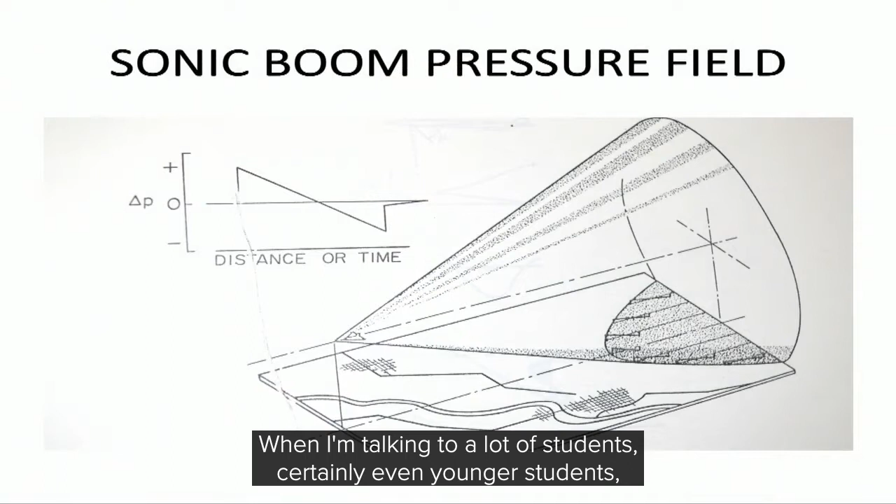Let me talk a little bit about what a sonic boom is. When I'm talking to a lot of students, certainly even younger students, I will often use the illustration of a balloon. All of you have atmospheric pressure on your ear right now, and that's the atmospheric pressure in this room.

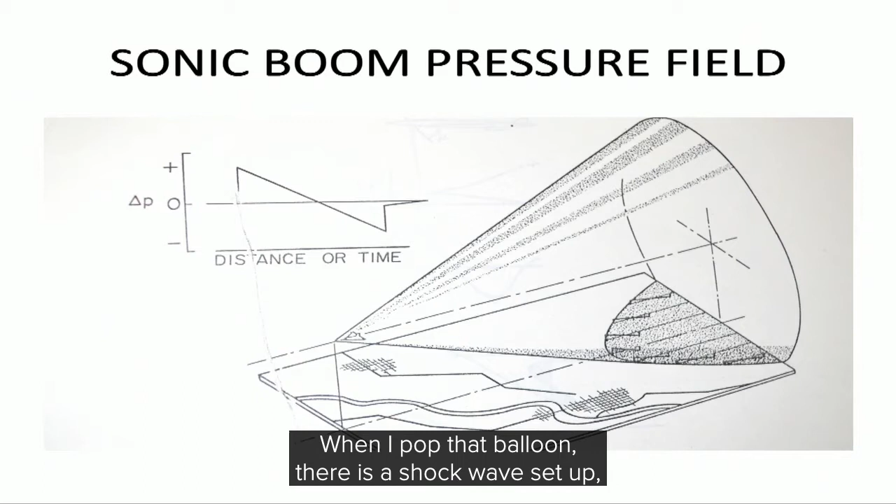If I were to blow up a balloon, I am putting more molecules into it. The air pressure in the balloon is getting higher than the air pressure in this room. When I pop that balloon, there is a shock wave set up going at the speed of sound in all directions, and that speed of sound at sea level is 760 miles an hour. When that shock wave hits your ear, the pressure on your ear jumps instantly to the pressure that was in the balloon. That is the pop you hear.

This has the same concept. When the airplane is going faster than the speed of sound, all of the disturbances that it's generating in the air are traveling at the speed of sound the same way. So the airplane is going faster than the disturbances it's creating, and they're going out in all directions. They continue to grow, that's why this cone is getting bigger and bigger.

What do you call it in math, where all of this is like the barrier to all of the disturbances? All of the disturbances are inside that cone. Because of molecules that are getting pushed out of the way, because of shocks off of the wing and the shocks off of the engines and things like that, all of those things are happening inside that cone. The pressure inside that cone is actually higher than the pressure outside the cone.

If this airplane is flying at 45 or 50,000 feet, that cone is going all the way to the ground. If you were standing in front of that intersection of the cone with the ground, you're in normal pressure because that cone is not in the ground in that white section right there in front of it. But as soon as that airplane moves a little bit, it's dragged over you and you hear the sonic boom. That's what a sonic boom is.

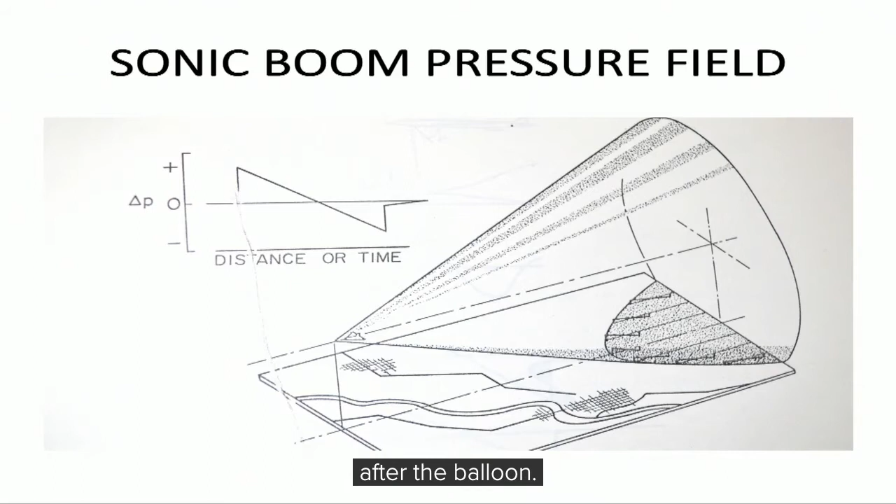Now, a lot of the military airplanes that were flying, their sonic boom was measured by what we call the far-field N wave, that N shape. That front shock is the difference in the pressure on your ear before the balloon and the pressure on your ear after the balloon. So it is the difference in pressure that you hear. See that left part of that N? That's what you're hearing. You can hear the same thing on the back of that N wave too.

If the airplane and things are long enough, there's enough time between those two shocks that you can distinguish it. They used to say if the shuttle flew over you, you would hear a boom boom. But lots of times when you hear a sonic boom, you just hear a boom because they're so close together you cannot distinguish two sounds, it's just one sound you hear. But that is generally how they would measure that delta P and what you hear.

A lot of the work that had been done starting back in the early 50s was work done by a man named Whitham, who tried to relate the airplane and the disturbances with a body of revolution, an axisymmetric vehicle. They were all trying to relate the area distribution, that A sub E, that goes with the airplane, with something called a Whitham F function, which says that if you were far enough away from that airplane, you could use an axisymmetric vehicle and get all of the area from it, and it would actually be an excellent mimic of that airplane and all the disturbances created by it.

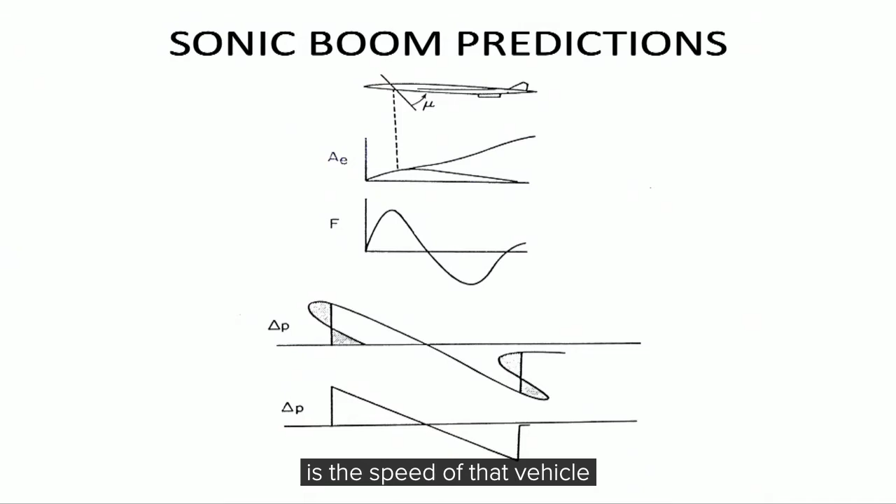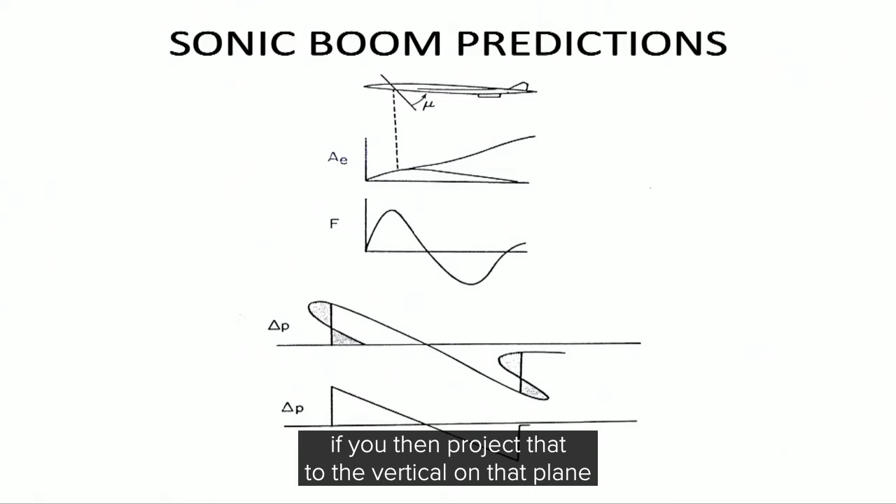That's the angle that you get. So they had the theory that if you had this line, this plane going through your airplane all along its axis, wherever it intersects that, if you project that to the vertical on that plane and bring it down here, that's the area due to the volume of the airplane. And that's what they've done. That's part of the equivalent area due to the volume of the airplane, and that's what the dashed line is going to.

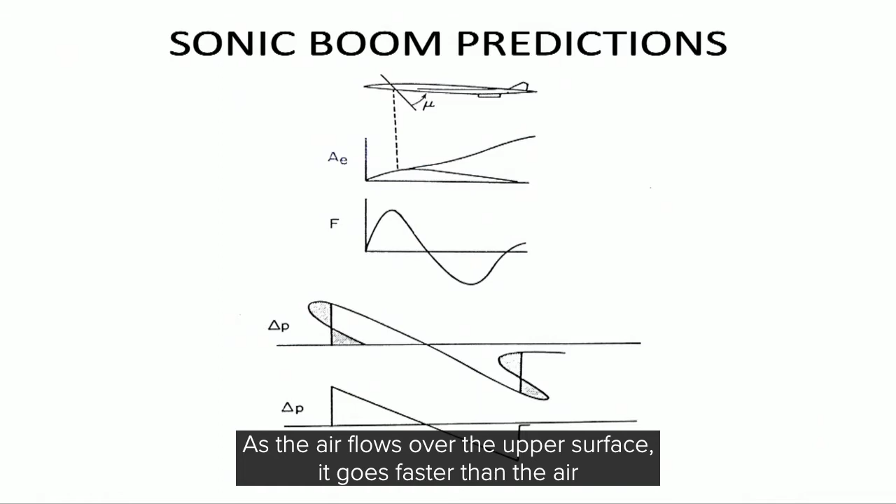They do the same thing with the second force on there. The other thing on the airplane is what keeps it up in the air, which is called the lift. The upper surface of an airplane is curved. As the air flows over the upper surface, it goes faster than the air under the airplane. You end up with lower pressure on top of the wing than you do under the wing. And so the resultant force on the wing is which way? Up. And that's called lift. That is what holds the airplane up.

So the second curve there with A sub E is the lift distribution. You actually integrate the lift up to that point and plot that as the area due to lift on the airplane. Now there are some integral equations that relate F as an integral of the equivalent area, and it's an Abel integral equation, and you can invert it so that you could also describe the area as a function of the F function. And that's what it does.

Now when that F function is flying, so to speak, it advances according to its amplitude. So down here on this fourth figure, you see that the top peak of that F function has advanced and it's double-valued. And so what they do is say, well, we can get rid of this multiple value, which isn't real, by bisecting that area, and you end up with the N wave again. That's how they were predicting the sonic boom signatures in early days.

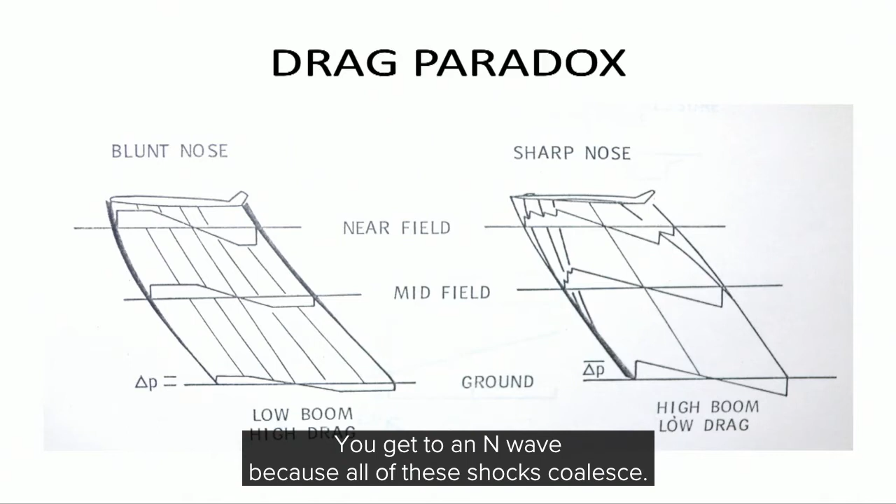So here you have one of the things that a sharp-nosed airplane shows — how all of this comes down through the atmosphere and to the ground. We called that the drag paradox, because you've got shocks coming off the nose of the airplane, shocks coming off other parts of the airplane. You get signatures up there that have lots of jags in them, and then you ultimately get to an N wave, because all of these shocks coalesce. Every time the shocks coalesce, they get stronger, and that's why that N wave can end up being very big.

Well, there was another discovery made by, I think, a man named Jones, who said, if you don't want that shock to move, if you don't want that front shock to intersect with those other shocks like we see over there, you don't want any increasing of the power of those shock waves — you need to make a lot of area in that airplane. So they said, okay, we're going to make that a Dirac delta function. It's an infinite jump, and then your airplane is going to be very, very blunt in the front. Well, it's pretty good — if you look through there, you don't see any of those areas coalescing with each other. They all attenuate all the way to the ground.

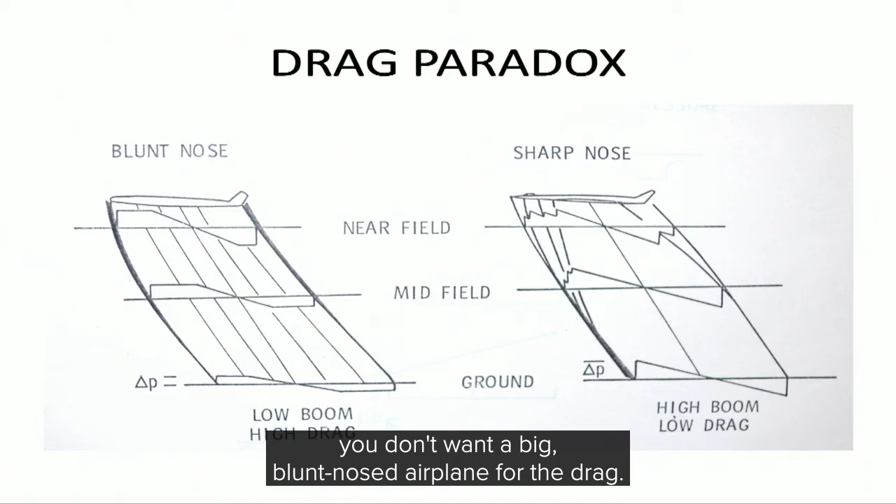But that big blunt nose costs a lot of gas. Somebody was talking about the drag on an airplane — you don't want a big blunt-nosed airplane for the drag. So that was one of the theories that we had to look at and think about: should we actually do that? And so that was the idea of the F function with the Dirac delta function in that area.

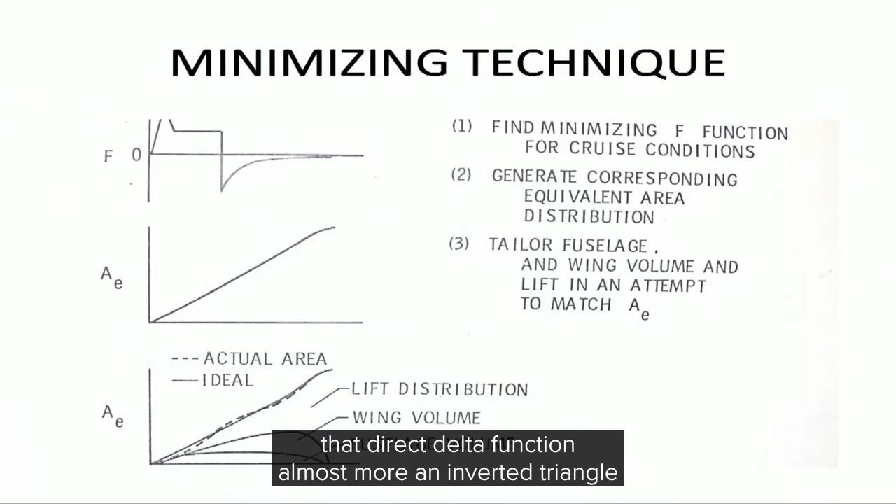One of the things my boss suggested is maybe we should actually make that Dirac delta function more of an inverted triangle and be able to control that, make it as wide as we could or as small as we could, to see what it does to the drag of that aircraft when we're designing it. That's one of the things I did.

What you want to do is describe what your minimizing F function is going to look like, and that's what that top curve is. It could be the Dirac delta function and then the flat area, and then you get that. Once you get the F function, you can define your area, and once you define your area, that's where we went to work defining airplanes.

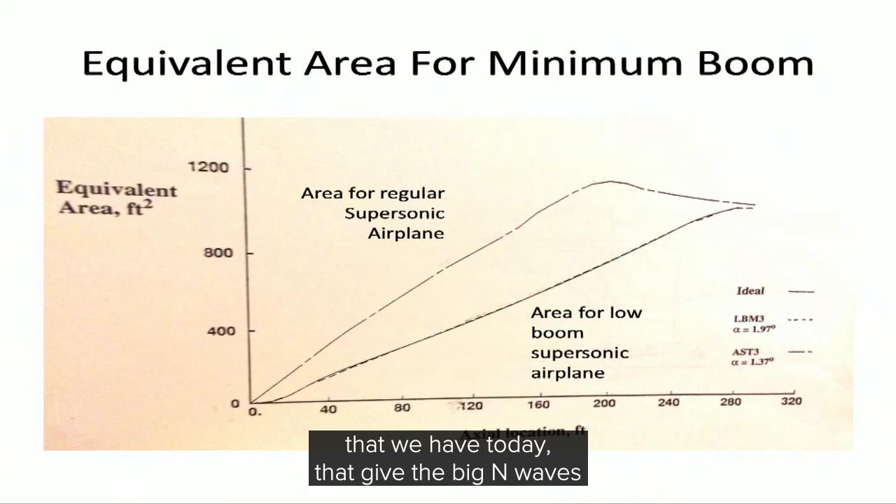So these are some equivalent areas that came out of the program we ultimately wrote. The top curve is more like the fighter airplanes we had today that give the big N waves, but the curves coming out of these low boom planes were the lower curves.

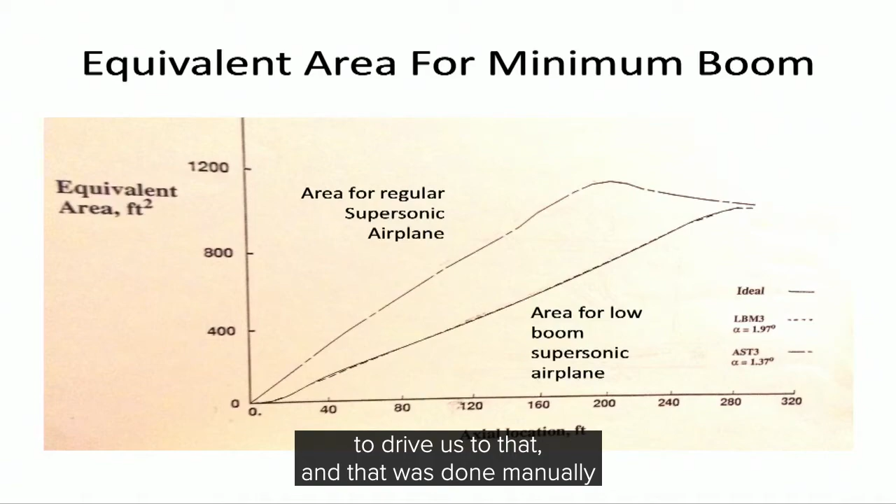Once the code was running, we started designing airplanes. We would design the fuselage and the wing, calculate the area due to volume and the area due to lift, add them up, and see how close it was to the target we were getting to. You can see the dashed line there, we got pretty close on that one. That might have been after 30 attempts, because the first attempt was probably up there near the first one. But we had to decide where the design needed to be changed to drive us to that, and that was done manually, which took us quite a while.

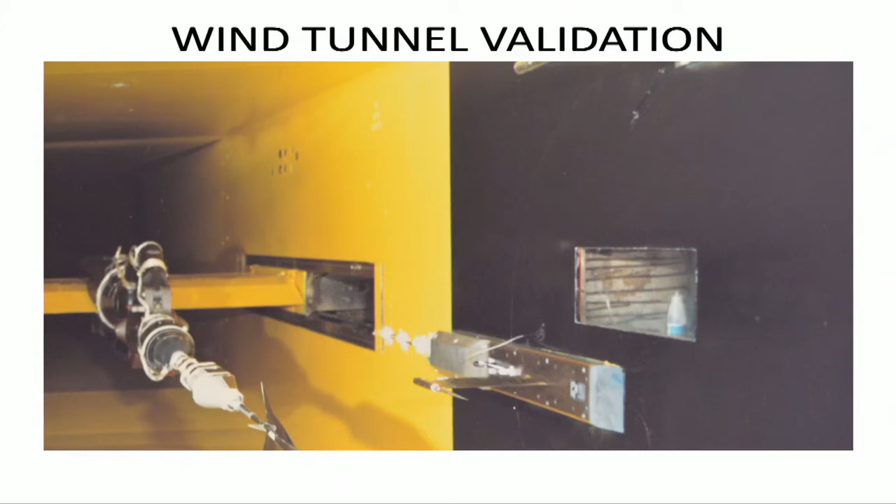We put those models in our supersonic wind tunnel, which was 4 by 4 feet. The model is installed there, and the ground is on the side. That's a pressure probe on the wall, and there's another pressure probe up top where you can't see it. That yellow bar across the back can actually move the airplane a short distance forward in the tunnel.

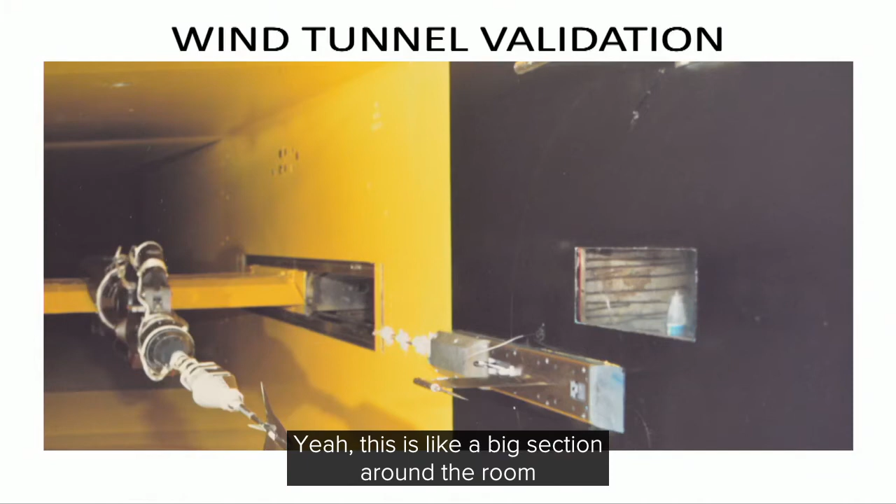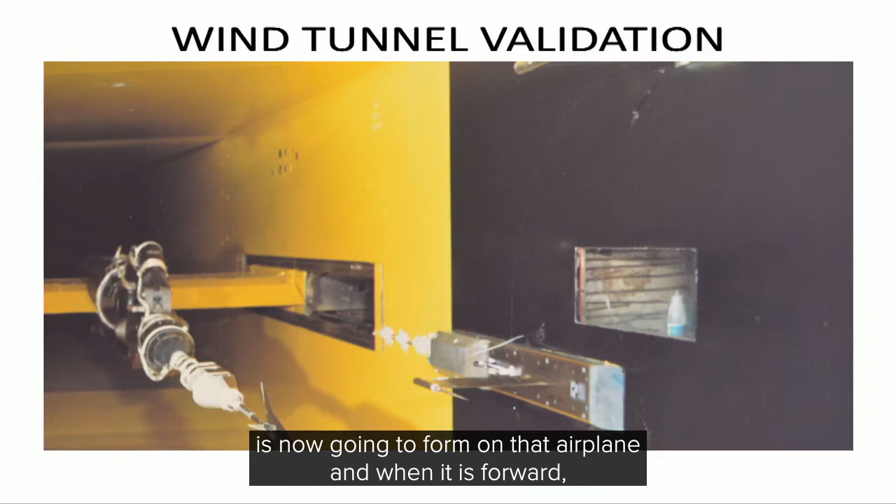So now you know what a wind tunnel is - this is like a big section around the room or the building with a huge compressor on one end that drives the air through there at your design Mach number. So it would drive the air through at Mach 2 or Mach 2.7. That Mach cone on the back of the airplane is going to form on that airplane, and when it's forward, you're going to read the pressure inside that cone on the bottom pressure probe, and the pressure outside that cone up at the top pressure probe. That's the delta P we would be seeing.

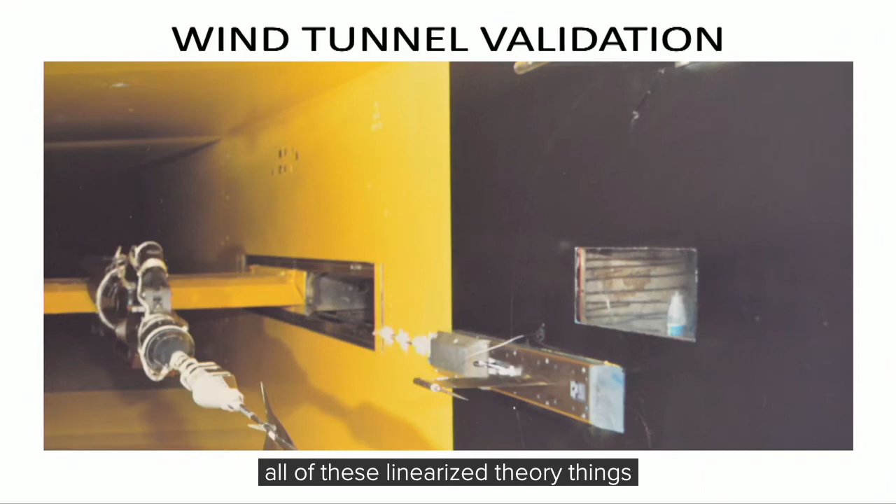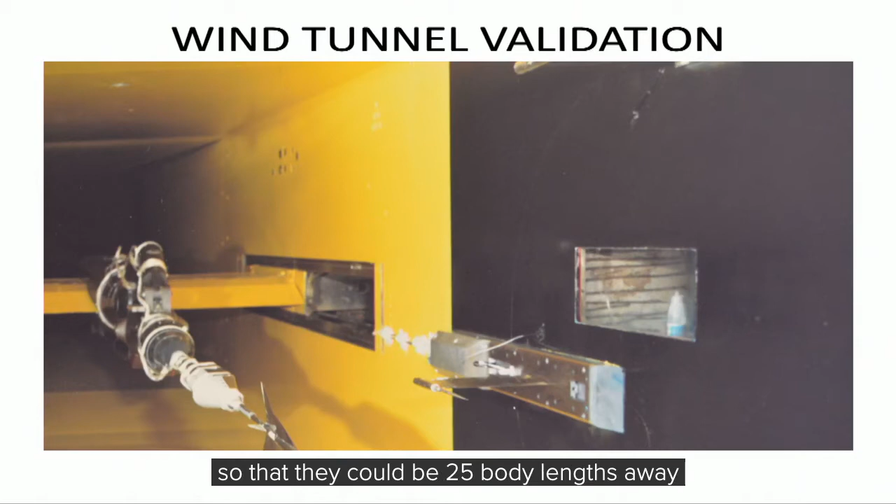One of the issues we ran into was that all these linearized theory things say you're supposed to be a big distance away - well, this is only 4 feet. When they started doing some of these tests, they were making the models smaller so they could be 25 body lengths away from the thing. But our models got bigger and bigger, and we were probably introducing some error into the results we were getting.

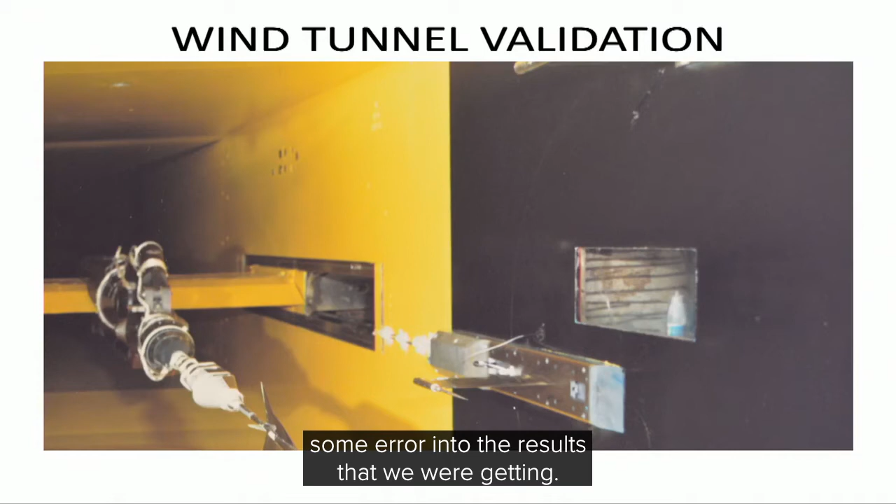But we did this, and we actually used some baseline military planes, like a Delta wing, and built a model of that - we'd get a big N wave. We would do an arrow wing of a military airplane, and we'd get an N wave. But when we started doing tests on these new designs, we were not getting N waves when we got closer. Of course the N wave was on the ground, but you could actually tell when it would become an N wave.

As I'm saying, as time went along - and I worked on this about 20-some years - of course the computers got bigger and better.

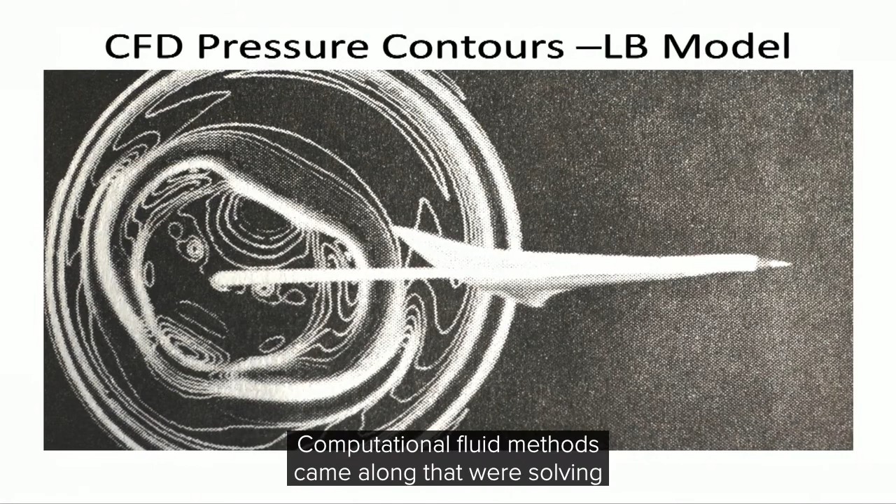Well, computational fluid methods came along that were solving all the equations and so forth. You see the shocks here by the dark areas, because you're having extreme pressure gradients in those areas. And we started actually using CFD codes to finalize some of the designs, to make sure we were doing it right.

One of the things we also worried about was, how do we get all the way to the ground with this? Because that signal, if we're flying at 45,000 feet, goes through 45,000 feet of atmosphere to the ground. So I also developed a code, a modified method of characteristics, working with some professors at NYU, so that we could calculate all the way through the atmosphere with this computational method, not just a linearized theory method. So we did that.

This part of the design was what we were calling the... what time did I start? 1 o'clock? 2? It's time for me to quit, isn't it?

Okay, so we used the CFD where we could in the later stages of our work. And we were about to say, well, we are getting what we expected to get from these designs and everything. So we said, we're about to stop the wind tunnel test.

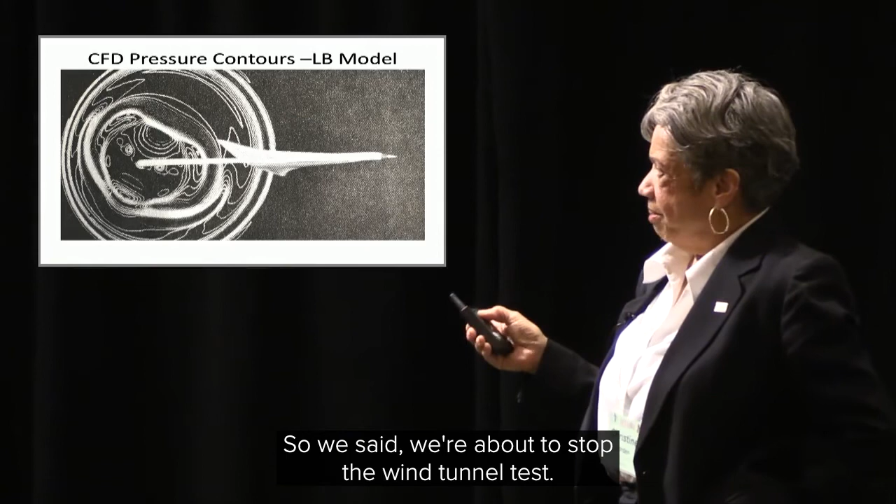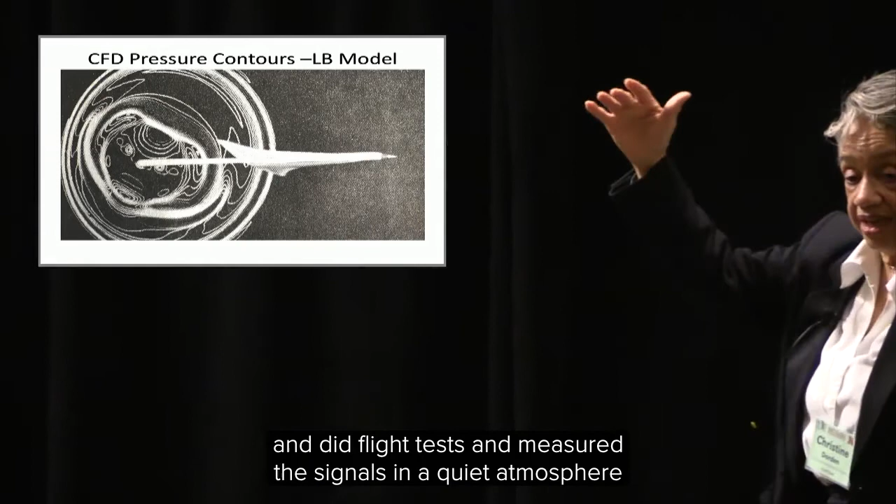And we did acoustics tests. We had a sound booth where people reacted to sonic booms. We also went out to White Sands, New Mexico, and did flight tests, measuring the signals in a quiet atmosphere and in a turbulent atmosphere. But we said, okay, we've kind of done what we said we were going to do.

Then somebody said, well, you know what, we need to do a flight test. We need to actually do this in an atmosphere. So we went out to California and borrowed two Air Force F-5s. And we put panels on one of the F-5s that made the equivalent area distribution match the one we had gotten as our target from our research.

When they did that flight out at the NASA center in California, you could hear the people in the control room shouting, just like they did in Hidden Figures when John Glenn came back from his orbit around the Earth. And it was successful. So once we declared this a success, and this was in 2003...